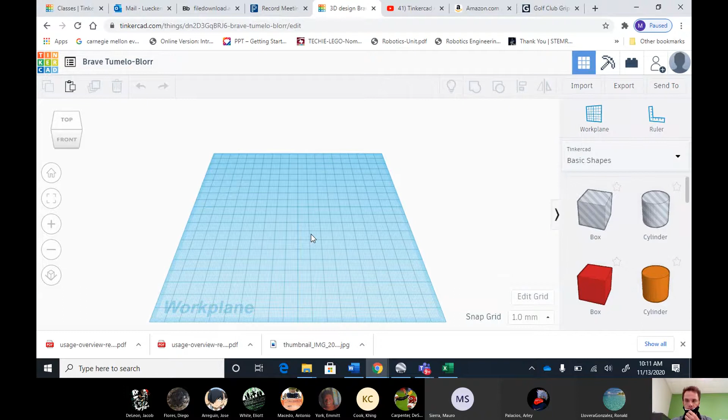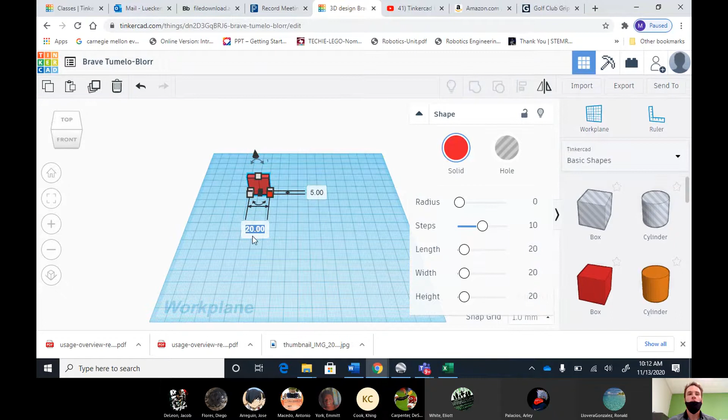So check it out, to do the walls again, I know some of you know how to do this. Let's say my wall, I'm just making this up right now, guys, let's say it's 5 millimeters wide. Let's say the length of my wall was 20 steps. 20 times 5 is 100, right? 20 times 5 is 100, so it'd be 100 millimeters. There's that wall, cool.

So then let's say this wall is 10 steps. Most of your walls are going to be longer than that, but let's say it's 10 steps, all right, that would be 50 millimeters.

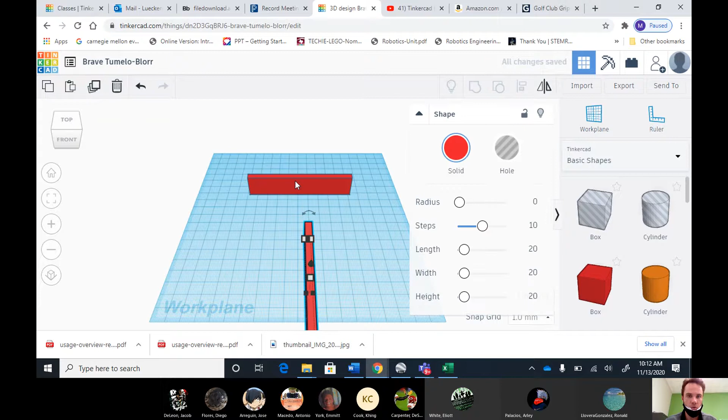So what you can do is shift, hold one wall, shift, hold the other, and... I really sometimes do not like this. Right there, and so I'm aligned along the X.

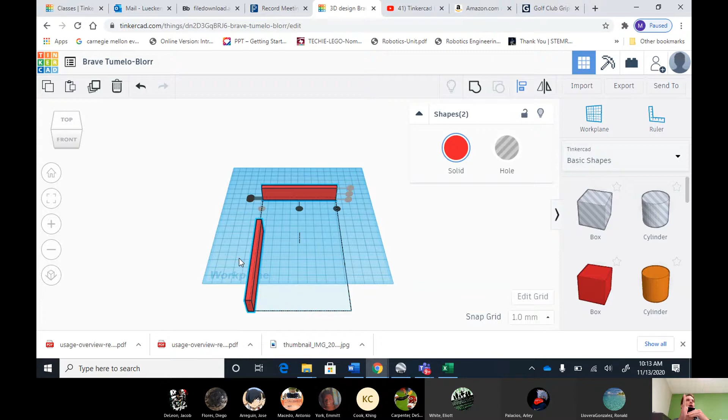Again guys, you were supposed to know what XY coordinates are. This is the X, this is the Y, right? It looks like a capital Y, it's vertical away from you, okay? So I have it along the X.

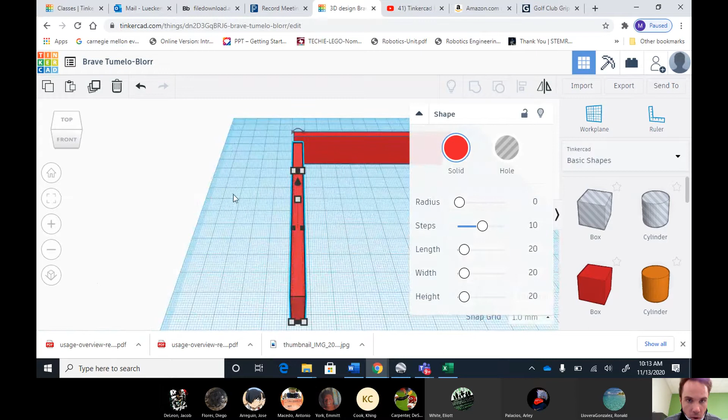You know what I can do? I can just hold down, I can select this one wall, okay, and I can put my up key on my keyboard, and I will stay on that X. I'm going to zoom on in, let me zoom in, I'm going to push that button. Cool, I'm going to push it up with the keyboard if you want.

And then I'm going to look around the side. All right, I got a little ways to go. I'm going to use my keyboard. Boom, it's in line, okay.

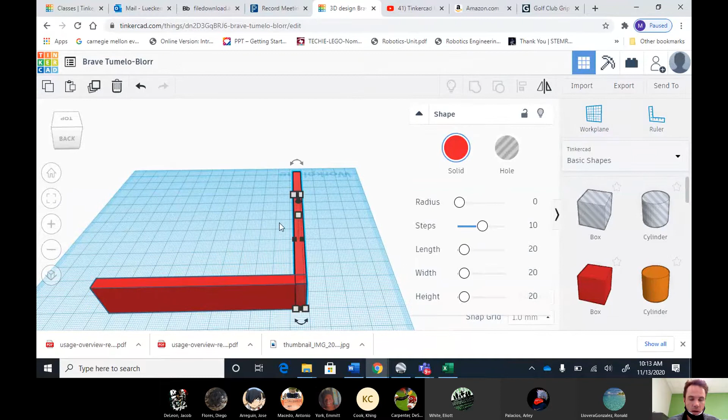So again guys, this is how you name your house, I'm sorry, I'm all over the place right now. Okay, some of you still didn't have the name of your house. You just type up there whatever your name is in house, so I know what to check.

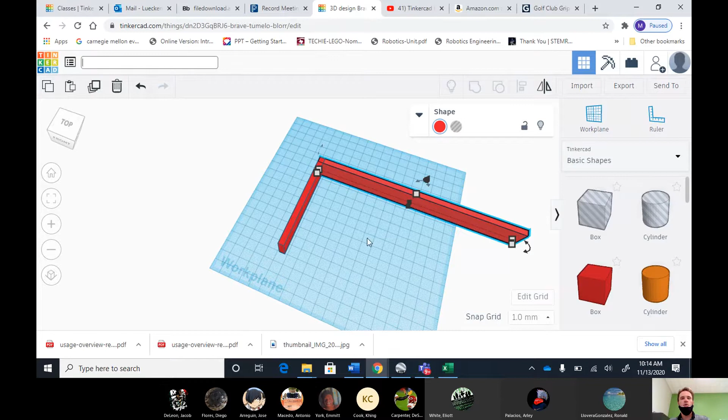You have to edit the grid, you see, this is the grid, the work plane, it's the grid or work plane, it's the same thing, okay? Obviously sometimes these need to be bigger, okay? You can make this like 400 by 400, that'll probably work. I push update grid, cool, see, it's bigger, all right.

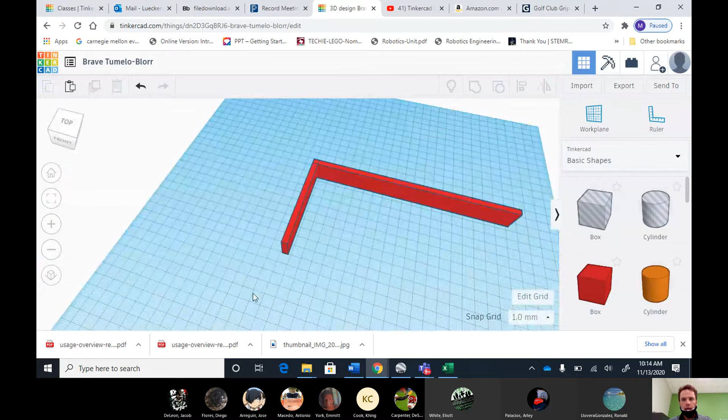So I'm going to do another wall. All right, a lot of times the best bet is to take that wall that you've done before, group it. Okay, so now that's just one object, so I can move it wherever I want.

We'll center it later on, I'm not worried about where it is along the work plane right now, I don't care about that. We can take it, group it, and center it later. Okay, so I would take this. I really hope people are watching. Why are you typing?

Okay, just watch, 5 millimeters, let's say it's 5 steps, that would be 25, be real short.

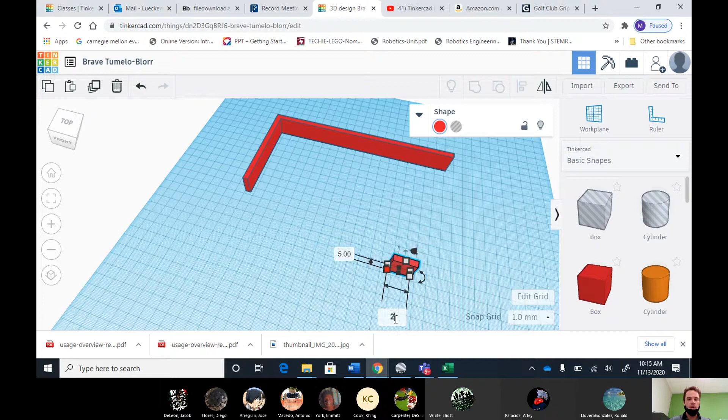Okay cool, what I do here, shift, let's see if this works, align, boom, just like that. You see how I did that?

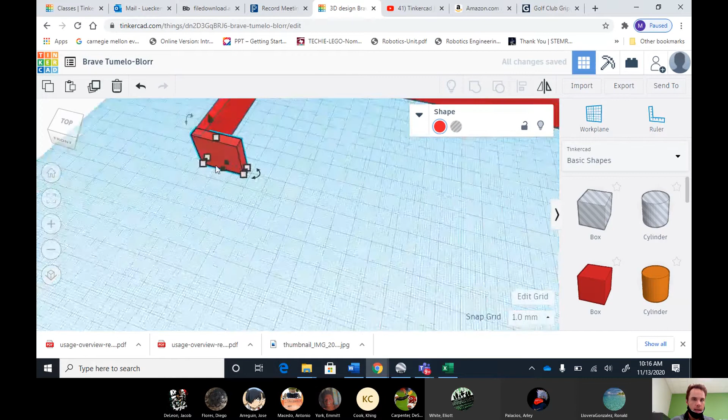Now what we can do is use the key. Oh, they're both selected, all right. Come here, I can use the keypad. I'm gonna zoom in and align it. Look, I can see right there, you see that little space right there?

I know it's hard for you guys to see, see that little space? Oh, I know I need to click it one more time. Boom, just like that, all right.

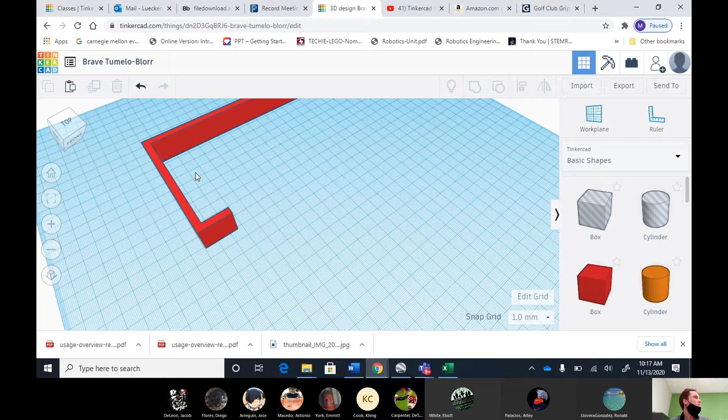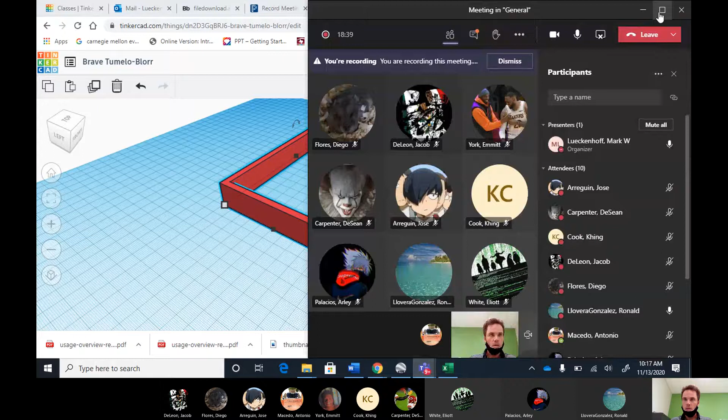All right, so now I'm going to check diagrams. Okay, boys physically in the class, let me see your diagrams with the walls and windows so I can get you credit. Guys, I'm trying to get you lots of hundreds just for doing things. Do you understand?

8 inches, what are you talking about? This is not the shape of your house. Yes, it is. No, it's not. I walked it. It's not the shape you showed.

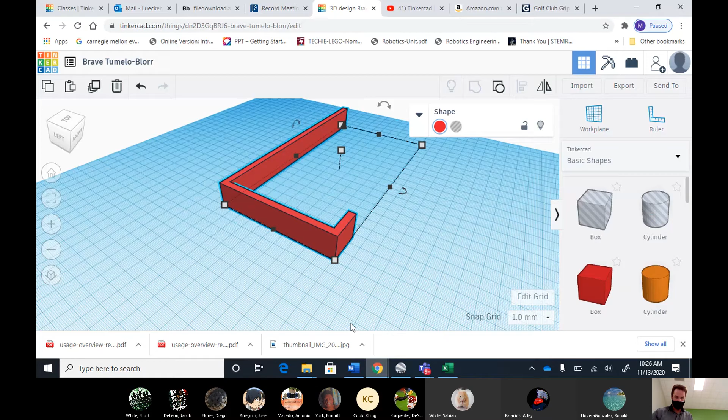Let me show you, I'm gonna let you work ahead because I know you can do things quickly. I already started putting windows and doors on. Okay, but did you space them correctly? That's the problem. See, what I would do is come in here, put that right on a corner. Okay, so what happens is this.

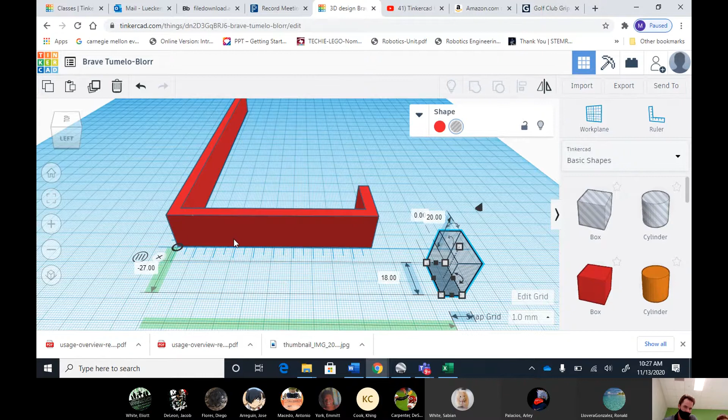So let's say you're doing a door, okay, just look. All right, it doesn't really matter, this isn't in proportion or whatever. So let's say that you have this, and this is 100 millimeters, right? And you're saying that your door starts 5 steps from this edge. Do you understand what I'm saying? So you will go, okay, 5 steps, 5 times 5 is 25.

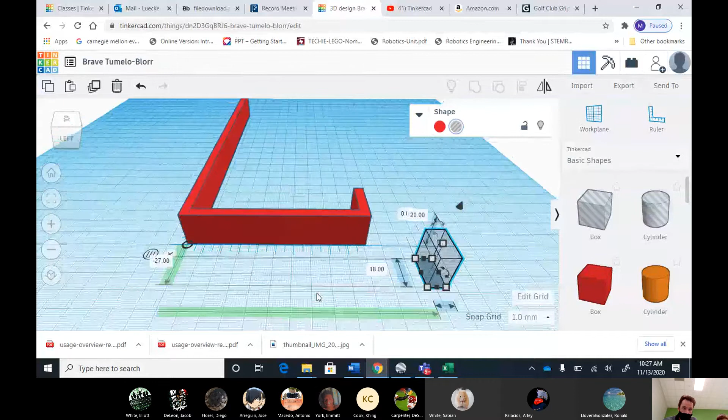So you come here, along this X, because it'll be 25 millimeters on here. When you click your hole, you click 25. Do you understand? And then you can just push forward like that. When you make your door or your windows, you can copy and paste a bunch of the same size windows and stick them in there at the exact spot. Then when you're done with them all, grab it all and group it, and there'll be a bunch of holes. Okay, then we'll go from there. You understand? Okay, go do that.

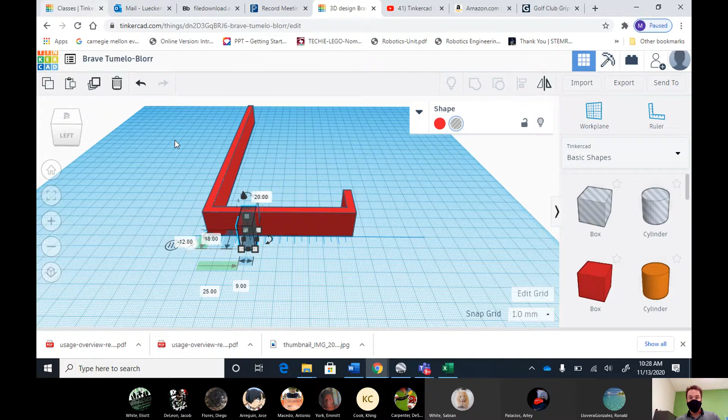All right, come here, Jose, please. I'm gonna ask you something, okay. I want you to—oh, I didn't realize.

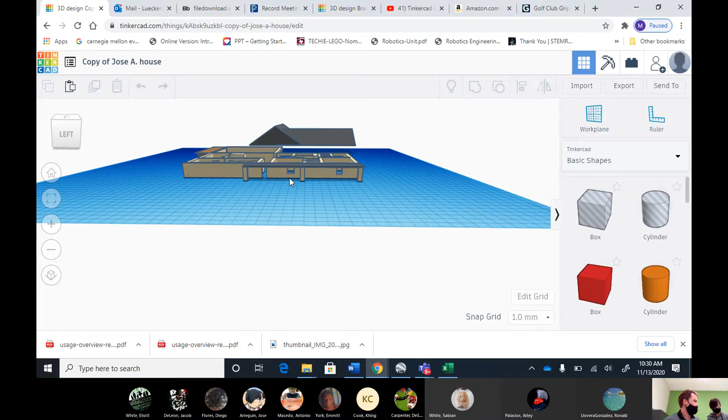All right, so let me go through this. Jacob, you sent me your diagram, where's your—you sent me an email? Yeah. Okay, do you have the windows and the doors on it? Yes. Okay, you're good, you can just chill for right now until I tell y'all how to do the doors and windows.

Diego, where's your diagram again? Yeah, I'm done with the walls. Well, I saw that, where's your diagram? What do you mean the diagram? You emailed it to me, correct? Yes. Okay, does it have doors and window distances? Oh no, I'm putting my shoes on right now so I could go check, the wall distance. Okay, you need to go do that right now and send it to me, it's gonna get 10 points off for being late. Okay, I'm putting my shoes on right now.

Ronald. Yes, sir. Okay, how did you get that diagram? Did you send that diagram? Did it have dimensions with the doors and windows? Yes, sir. Okay, okay, you're good.

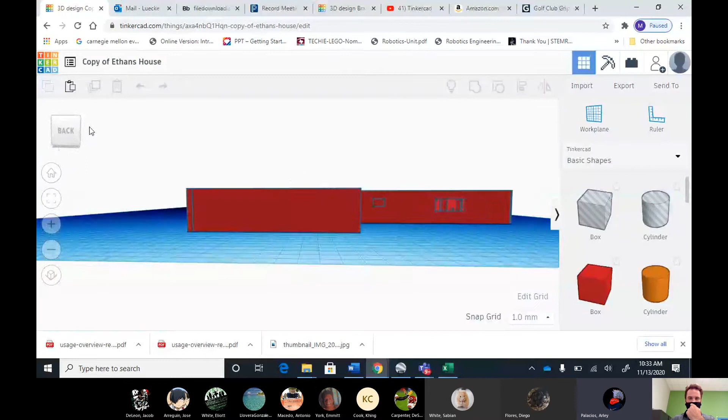All right, I guess I saw something different. Is this it? Yes, sir. Okay, I don't know how you spaced those windows, guys, but I told y'all not to really... I like the effort, but I gotta teach y'all how to space these windows correctly and do those correctly, okay? All right, I'll change that.

Sabian. Yes. Did you send me... where's your diagram? I have to get my phone, I haven't got it yet. What have you been doing for the past 10 minutes? That's what I'm not understanding. The house? Are you doing the walls right now? Yes. Okay, you need to send me the diagram, that's what I need to see, please. Okay, guys, when you send it to me I'm going to start looking at addresses to make sure these diagrams match up to the house. Okay? Because some of these don't match, and I hope we aren't making anything up, or they aren't just completely off.

Emmett. Emmitt, he's not answering. Emmett. All right, so Emmitt's not answering.

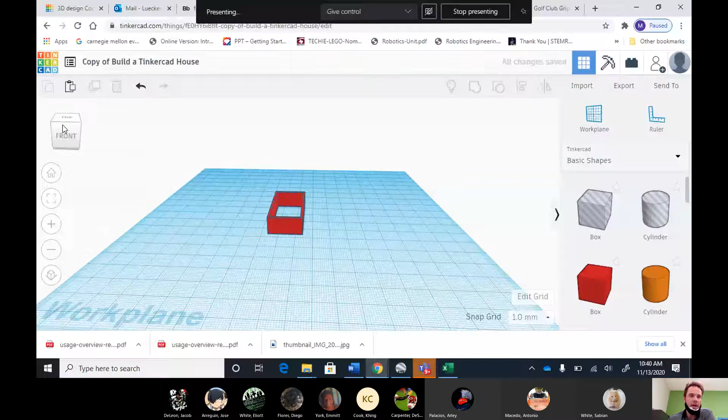I don't have anything complex right here, just a rectangular wall. So I'm going to show us a few things that can be done.

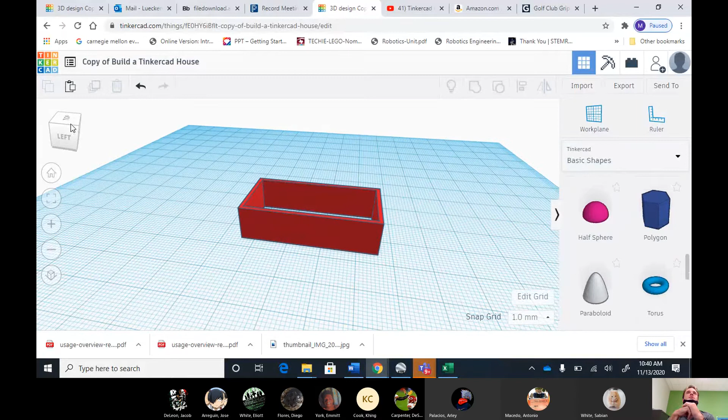20 millimeters, guys, on your house, depends on if you have a 2-story or 1-story house. I'm just going to say these houses are going to be as close as we can get to your house. Are they going to be perfect replicas? No, I would need everybody right here in front of me, and it would take a long time for us to do. We're going to do the best we can, okay?

And we're going to learn how to do some computer-aided design, all right? I got to make sure everyone sees what I'm doing.

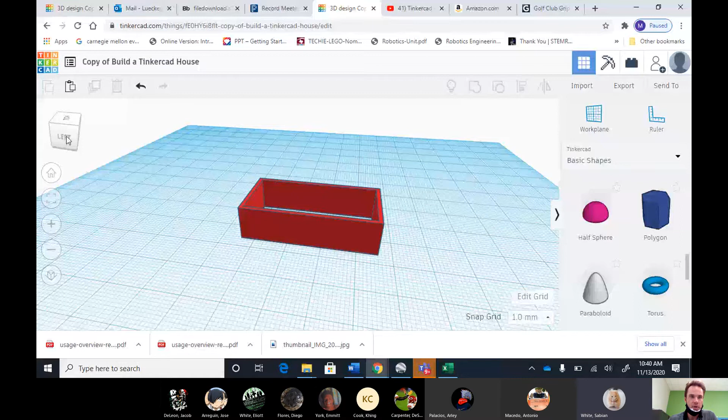How are you meant to do the second story? Okay, we'll talk about that. Guys, I'm going to get more personalized with you, that's why I need to see pictures of your house, so that I can tutor you on how we're going to get it to look as much like your house as possible.

But what we're going to do now is say that everybody's house that is 1 story, as of now, is 12 steps high, 12 steps tall, that's what we're going to say. And everybody that has a 2-story house, we're going to call it 24 steps. I can put this into writing later on.

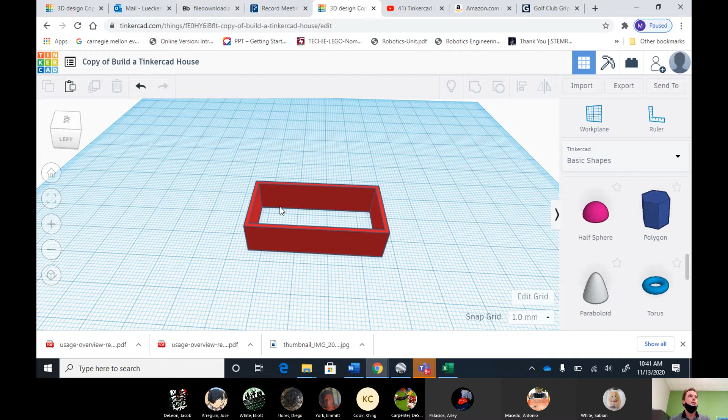But let's pay attention. Let's say I'm doing a 1-story house. I'm going to say this house is 12 feet high. So 12 times 5 is 60. So I'm going to raise this to 60 millimeters, just like that.

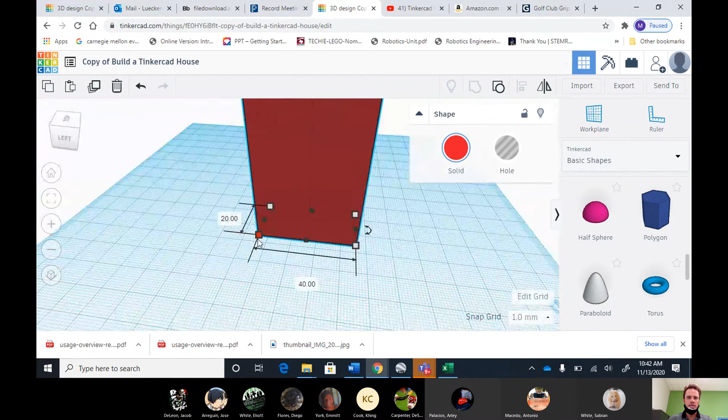This house would be really... whoa, this house is just really small. Okay, I'm gonna expand this to make this bigger. That doesn't make sense.

Let's not do 60, let's do 50 for right now. So let's do 50 millimeters. This house is just really small, guys.

All right, let me do one. I'm going to edit my grid and make it bigger. And now my computer is running really slow.

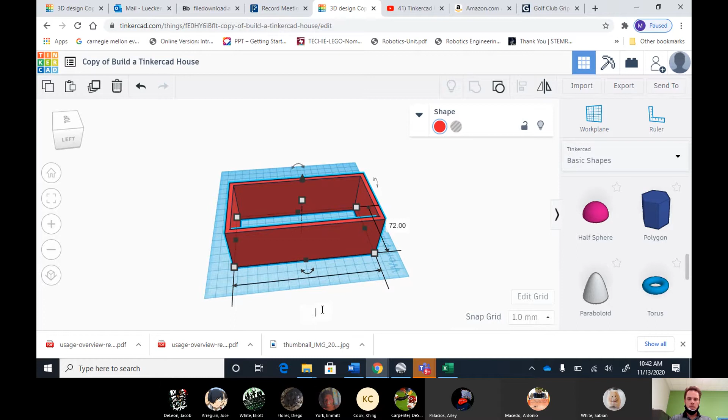150, I'm going to do this house by 200, I mean 100, okay, just so it's bigger. All right, I'm going to move it back. Okay, cool, so we'll do 50 for right now.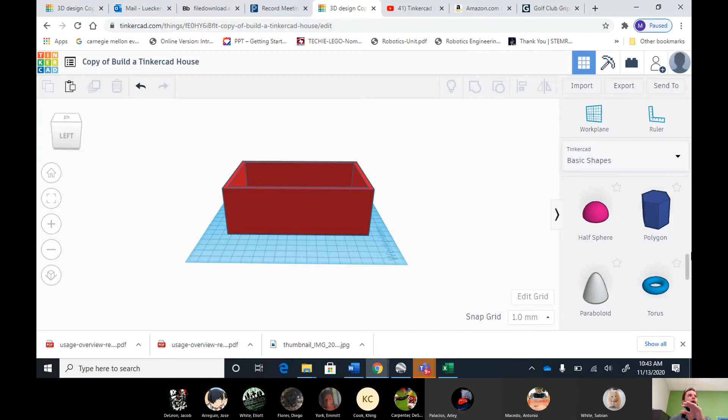Okay, so 10 steps high. All right, so first off, what we can do is, I know some of you guys, I'm going to do this later when I see the pictures of the houses. There's a good chance I'm going to edit it with you, and I will help you if you have some features to the house that are a little different, where it's not just the windows. I'm just going to show you guys how to make windows and doors on regular flat facing walls.

So first thing we need to do is take out a ruler. You see how I clicked a ruler? And I'm going to place this ruler right on the corner, the right angle, to the best of my ability, where the right angle is, right? So we have an X and we have a Y.

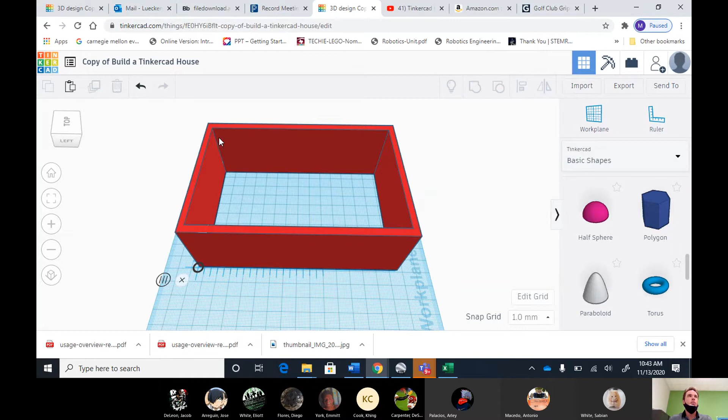Then what I'm going to do is make the windows, all right? This is how I'm going to make the windows. I'm going to take a box, and the door is going to be like this too. I don't know how wide your windows are, but I figure that most people's windows were about 2 steps wide. Am I right? About 2 steps, okay?

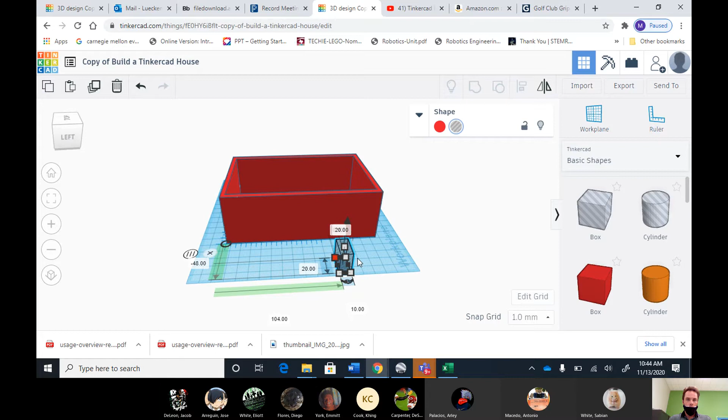So I'm going to call this 10, 10 millimeters wide. And I would say that the height, we could estimate, of most windows, let me center up on this, the height of most of these windows would be 3 steps high. So 3 times 5 is 15, just like that.

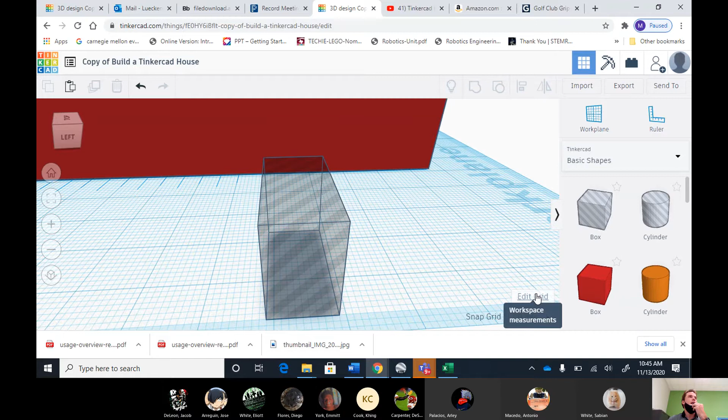And we can estimate that the windows above the ground, if you want to estimate, would be probably 2 steps tall. Let's just estimate that, okay? So what I'm going to do, I'm going to pay attention.

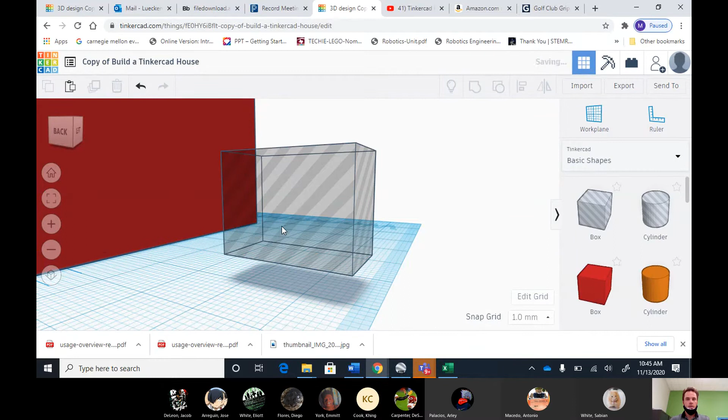Hold on, I'm going to grab this, right, and I'm going to raise this window 10. Remember, if you mess up, guys, all you got to do is Control Z. I'm going to raise this window 10 millimeters off the ground for 2 steps. Okay, cool, that's good, I'm good.

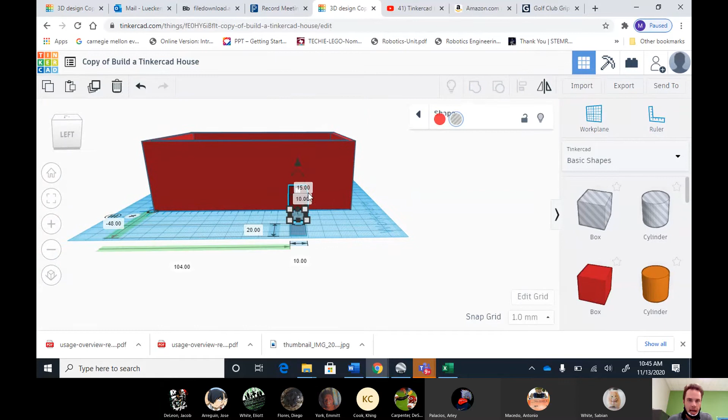Now, depending on how many windows you have, all right, this actually, I need to raise it higher. I'm going to do it at 15, okay? Depending on how many windows you have, I want you to copy and paste these windows right now, this whole box, okay, you'll see what we're doing. So let's say I have 4 of these.

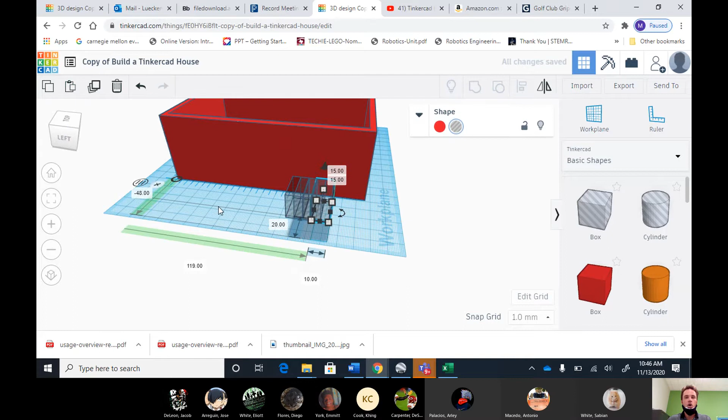I'm going to click it, go copy, paste. I'm going to click it, go copy, paste. Now I have all of these boxes ready to rock and roll. I don't have to go through and make another one and another one, right? That's too difficult.

Now what I'm going to do is look at my diagram, and I realize that my first window from this corner of this wall starts 3 steps. 1, 2, 3. It starts 3 steps from the edge of that wall, right? So this is what I'm going to do, guys.

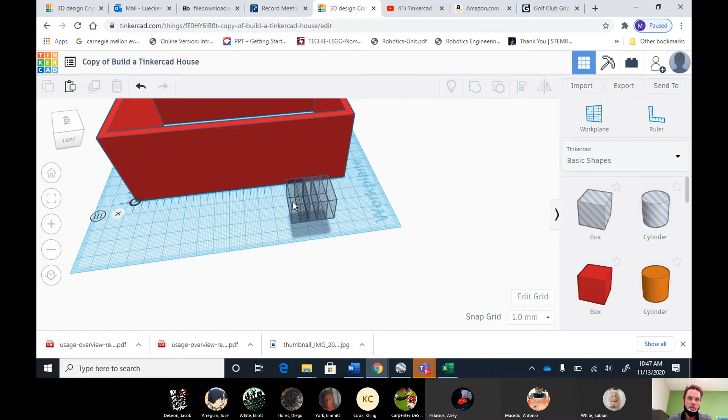I'm going to take one of those windows, and I can see that along the x-axis, the very beginning of this window is 67 millimeters from here, the edge, to the beginning of that shape. Well, if I want it to be at 3 steps, right? 3 times 5 is what? 15. So I'm going to come in here on the X, and I'm going to type in 15.

So I'm good. Now all I'm going to do is take my arrow key. Don't worry about doing the Y. Take your arrow key and push up on your keyboard. I'm going to go like this into that wall, so it sits right in that wall. Do we see? Cool. Now I'm going to take another window.

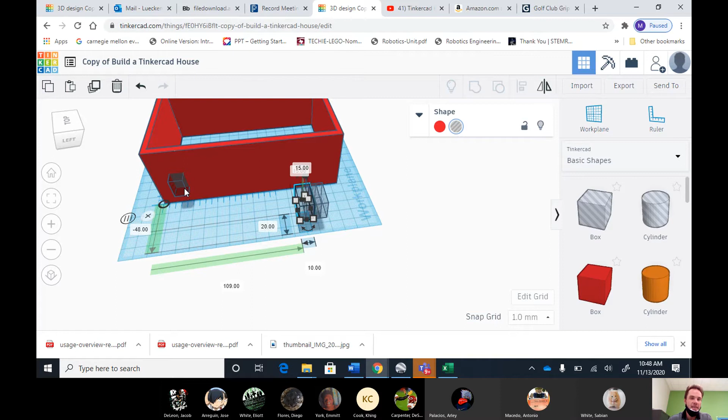Let's say from here to here is 3 steps, then it's another 2 steps, right? So that's 5 steps. So this should be how many millimeters? 25, because 5 times 5 equals 25. Let's say it's another 3 feet from this window to the next window. What am I going to do? 25 plus 15, because it's 3 feet here, which is 15, another 2 feet, which is 10, then another 3 feet, which is another 15. 15 plus 10 plus 15 equals 40, okay?

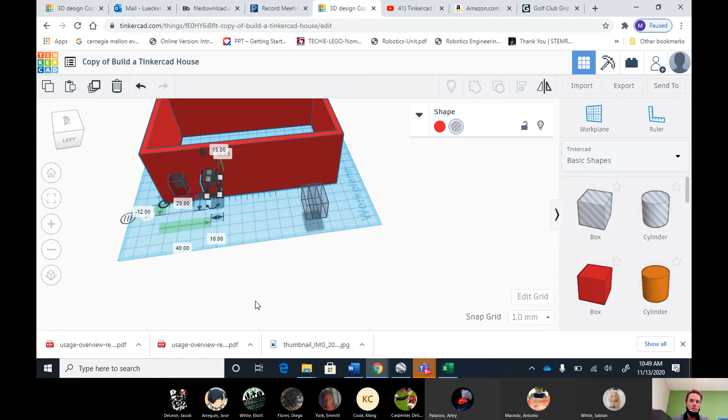So all I do right here is type in what? Along the X, 40. Boom. It's perfectly right where it's supposed to be. Now I take my arrow key up, put it into the wall. Do we see that? Now I'm going to take my next window.

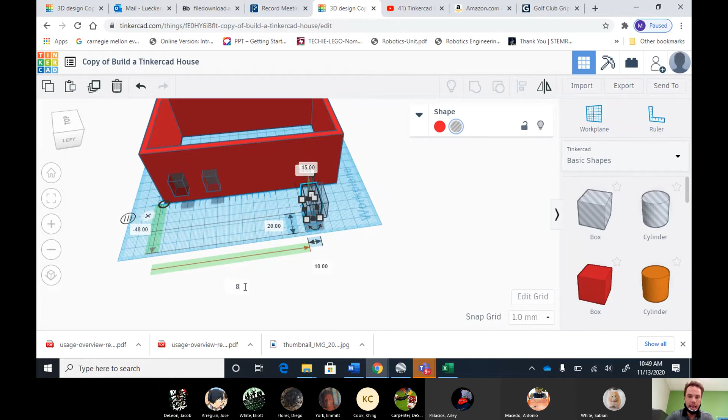We'll do the doors later, just do all the windows at once. So again, this is 40, this is another 2 feet, okay, so we're at 60 right here. Then let's say your next window was 5 more steps, 5 times 5 would be 25. So we know we're at 60 here, so we go to 85. I type in 85, enter, push my arrow key up, just like this, into the wall.

Now our final one. Remember here, guys, I'm just making these up as I go. But remember, it was 40 millimeters to here. There's 2 things you can do. You can add up all the way to get there, or you can take this ruler to switch the way the ruler works. You just click that circle and you could put it here.

And guys, this isn't going to match because I'm just making this up. Let's say you wanted this one. That one was, you know what? I'm going to go back. I don't want to confuse you all. I bet some of you understand what I was going there. What's up?

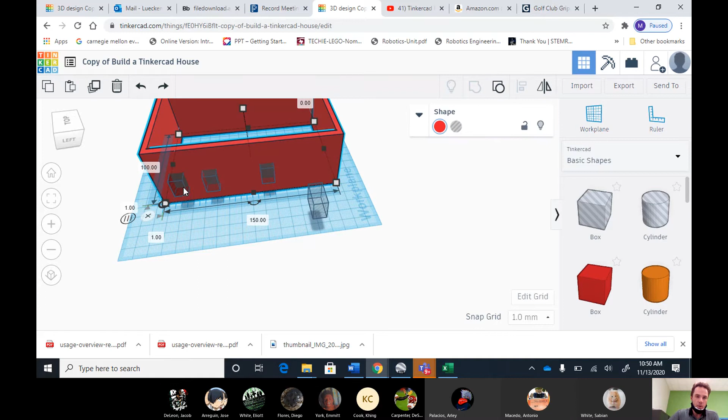Then you'll just have to make them different sizes. Okay, so again, guys, I know this can be confusing from afar. 3 steps, so it's 15. Another, you see this 15 right here? Then another 2 feet, so it's 25. This one was 40, right, because it was 8 feet. Then another 2 feet, okay, so that was 10 feet.

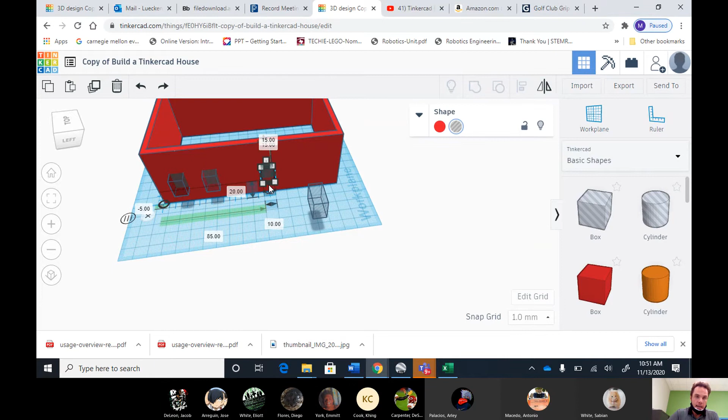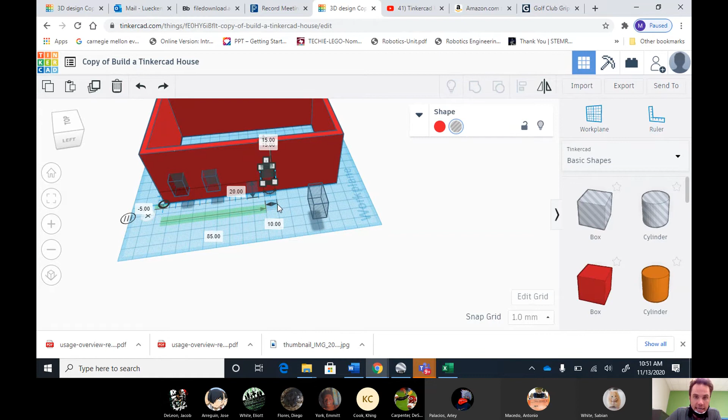Then we come here, 85, another 10. The distance between these two right here, we got 25 and we got 40. So the distance between them was 10 millimeters. So what I do is from here to here is 85, 95, then another 10 is 105. So this one will start at 105. I know this is hard to pay attention to because you don't have a diagram, but you guys can look at your diagrams and do this.

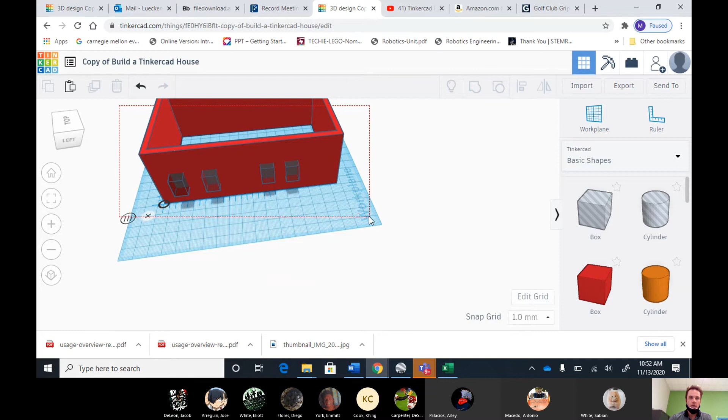Every number just equals 5. I push my arrow key up into the wall. Now I want to make these windows, guys. I know they're not perfect, these are a little too close together. I come here, I grab everything, and what do I push? Group. And now I have my holes for my windows. We'll put window glass in there later, okay? I'll show you how to do that later, all right?

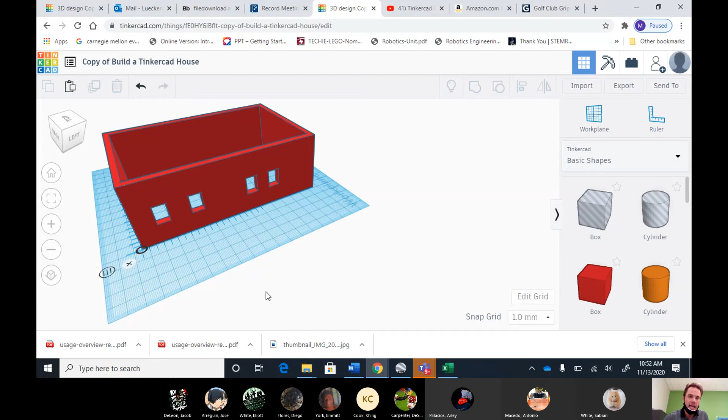So this is what I want y'all to do. Again, create the windows and doors of your home, all right? Use this ruler, put it on a corner, and just use the x-axis, then push the arrows up to make that hole, okay?

Let me see, raise your hand. I know some of you are probably confused. I get it, because we're far away, and I'm kind of worried about how this is going to go with y'all being remote, okay? Who here from afar understands what I just did and thinks that they can do that and work on it?

Jacob, you understand? Diego, Antonio, what's up? Do you understand what I just did? Okay, yes, I did.

All right, those of you, get working on it. If you have questions, call out, and I'll have you share your screen and I'll help you with it.

Sabian, have you sent that yet? I am putting in an email right now. I don't even.

Come on, bud. Emmitt, are you there? Yes, sir. Okay, Emmitt, where's your diagram? And I called you earlier, you weren't there. Where's your diagram? The 3D design. No, your diagram, your written diagram that you measured. You went and walked around your house or apartment and you made a diagram. You still have not done that. No, sir. What I don't understand is why you just don't go out and do it right now. What's the issue? There is no issue. Then you need to do it right now, please.